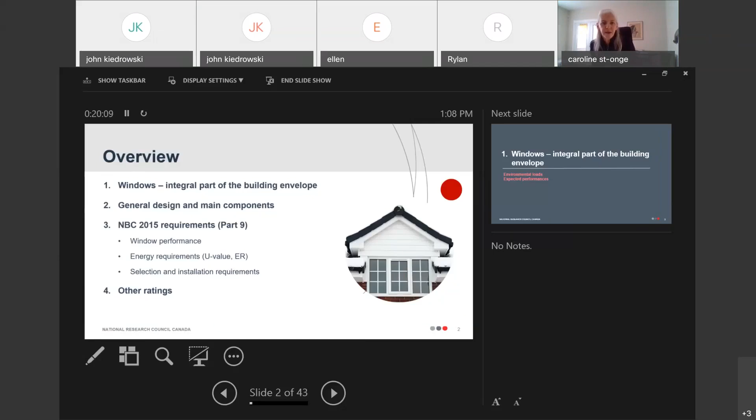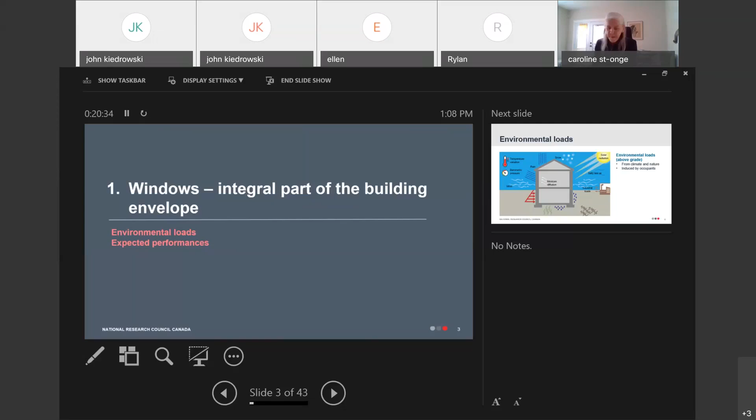For this first section, I would like to put into perspective the environmental loads that the building envelope is exposed to, because windows are part of the building envelope, so it's important to understand these loads. This figure shows the climate and nature loads over the building envelope, the roof and the wall, above grade. The building envelope is exposed to snow load, wind-driven rain, temperature variation, wind, solar radiation, salt sea air, and so on. It's also exposed to induced loads by occupants, such as moisture diffusion that goes through the envelope.

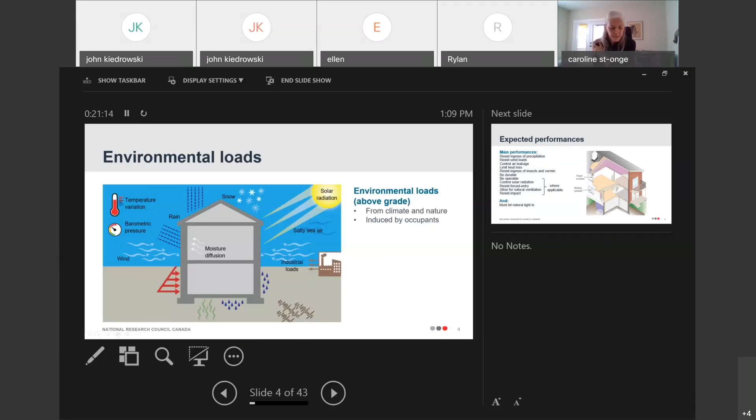It's the same with windows. Once installed within the building wall, windows are subjected to the same climate and nature loads. We expect the window to resist ingress of precipitation, resist wind loads, control air leakage, limit heat loss, control solar radiation, resist forced entry, etc. At the end, we also ask that we can see through windows, so they must let natural light in. So we are very demanding on window systems.

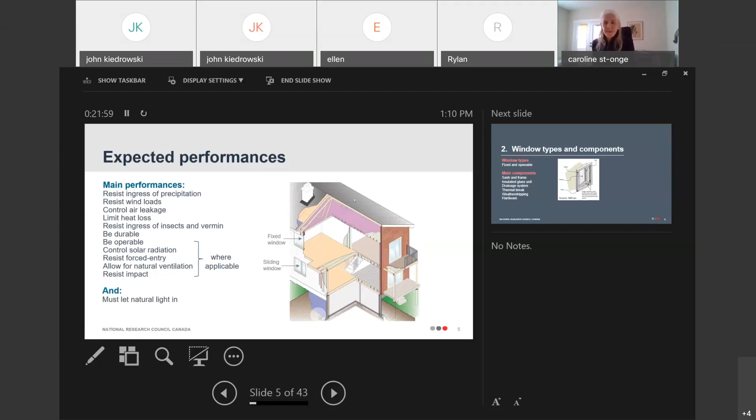Let's start section number 2, where I will go over window types and main components. I'm showing a simple configuration of a window, because I will use a lot of window terminology through my presentation: sash, frame, glazing, and so on. As an introduction, this would be a casement window with the frame. This is the sash that holds the glazing unit, and the frame is fixed to the rough opening of the wall.

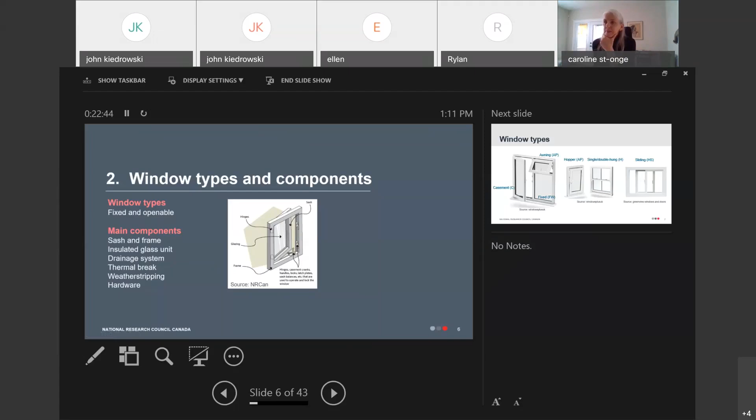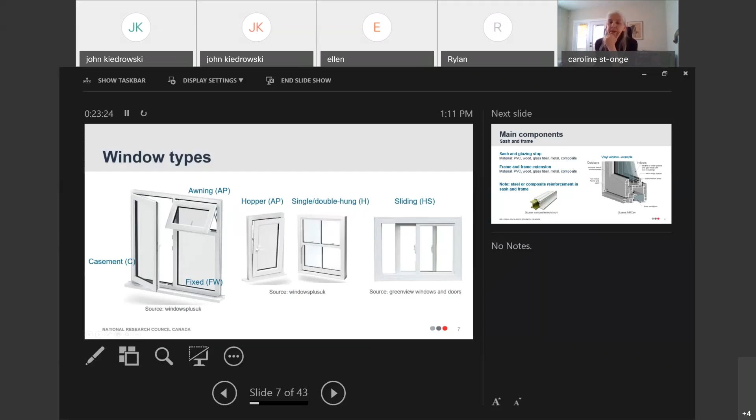The window types, besides fixed windows, include operable windows such as, from left to right: casement, awning, and hopper, with hinges. Awning and casement have hinges; single and double hung slide vertically; and there's the horizontal sliding window. I've added at the end of each type an acronym, which is important, because when you look at a window listing, you'll see mostly the acronym used at the end of a rating.

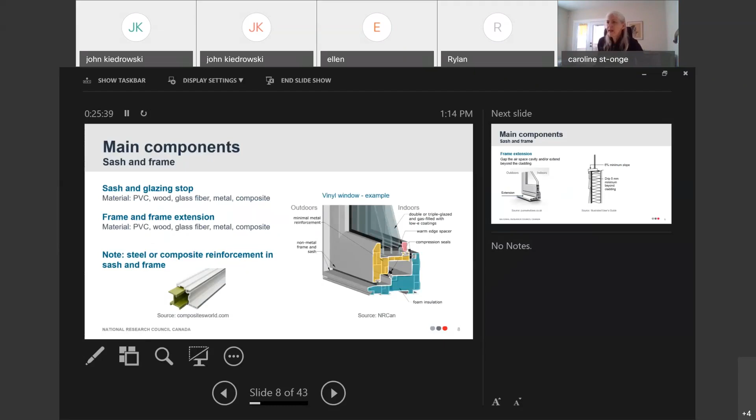A frame can come with an extension. On the left side, I'm showing a cross section of a PVC window. This is the frame, this whole part, and it would extend over the wall to cover the gap in the air cavity between the sheathing membrane and the cladding, helping to extend the frame beyond the cladding.

On the right side, I'm showing, from the National Building Code, the requirement for a self-flashing window: they should extend beyond the cladding.

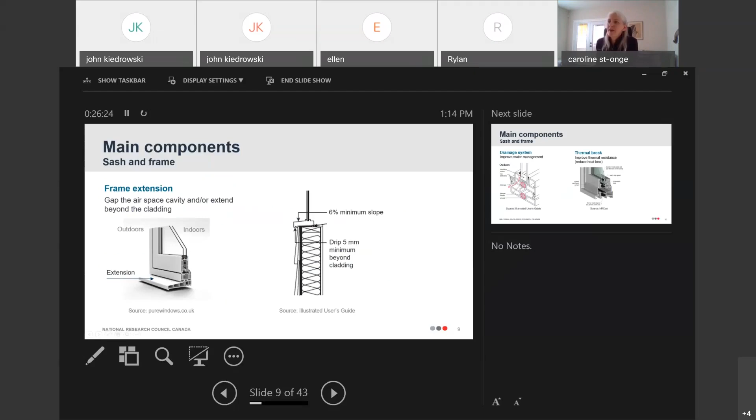Another important part of the design of the window is the drainage system. Not all windows have a drainage system, but some do. On the left side, I'm showing a cross-section of a window made of metal, a casement window. The pink arrow shows the possible path of water, because between the insulated glass unit and the sash there might be a problem with the sealant, and water can get in.

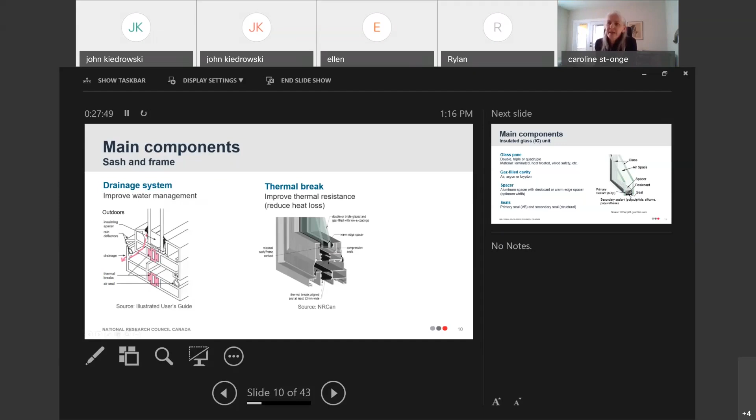The designer of the window created holes within the sash and frame so the water can be evacuated out. On the right side, I'm showing another important component, the thermal break, especially for metal sash and frame. Here, this is the sash, and below it the frame. The black section is showing the thermal break, which is usually almost halfway in the width of the sash or frame. On the left side, you have the thermal break as well, shown in pink, in the sash and in the frame of the window.

Another important component of the window is the insulated glass unit, also called an IG unit. I'm sure you've heard about IG units. An IG unit includes glass panes, and the glass is held in place with a spacer installed at the perimeter of the panes, which permits maintaining a specific width between the two panes.

The spacer shown in this figure is an aluminum spacer with a desiccant, a drying material to absorb moisture present between both panes. The IG unit includes a sealant, shown here below the spacer with the desiccant, and in black below it these are the seals. There is seal as well on the side, the primary seal and the secondary seal, which is structural to hold the panes in place.

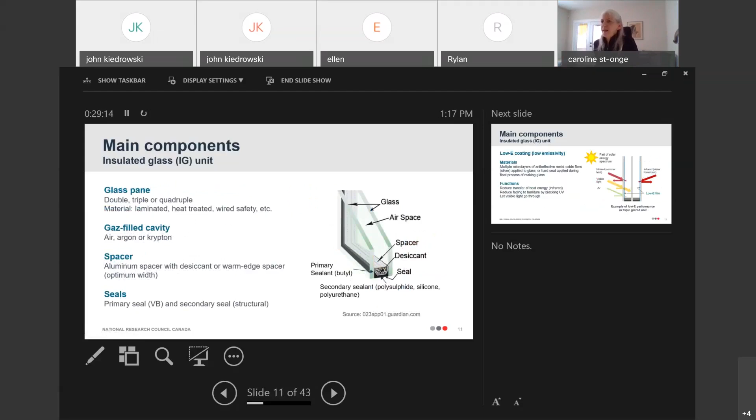Since most of the energy loss is through the IG unit, designs were created to lower the issue of heat transfer through the glazing by inventing low-E coating. Low-E means low emissivity. In this figure, you can see the low emissivity coating represented by the blue line.

In such a design, you would expect that the IG unit with the low-E coating would reduce the transfer of heat, infrared radiation, from exterior through to the interior, and would reduce UV through the IG unit. By reducing the heat, it controls the environment better, and by reducing UV, it reduces the fading of your furniture and decor.

But although the technology reduces those transfers of energy, it will let the visible light go through the IG unit. On the interior side, the low-E coating will help reduce the home heat from going through the IG unit, so it keeps the heat back inside.

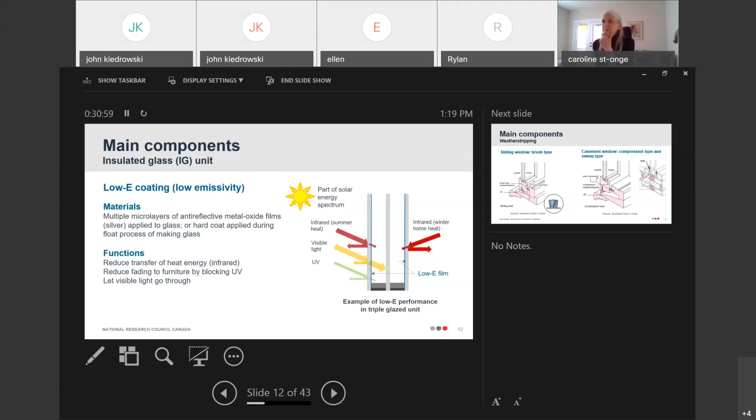Weather stripping, another part of the window which is extremely important for operable windows. On the left side, I'm showing a sliding window. Sliding window would have weather stripping in the type of brush, like a toothbrush. Since it is a sliding sash over a fixed frame, this is the type of weather stripping designed for that type of window. For casement window, since the sash swings over and compresses against the frame, you need a compression seal. There is also a seal between the glazing, the IG unit, and the sash, shown here on the right figure.

The red line is showing the path of air leakage between the sash and the frame. Although they are closed and locked, if the seals are not properly installed, or there is a defect in the seal, you would have air leakage.

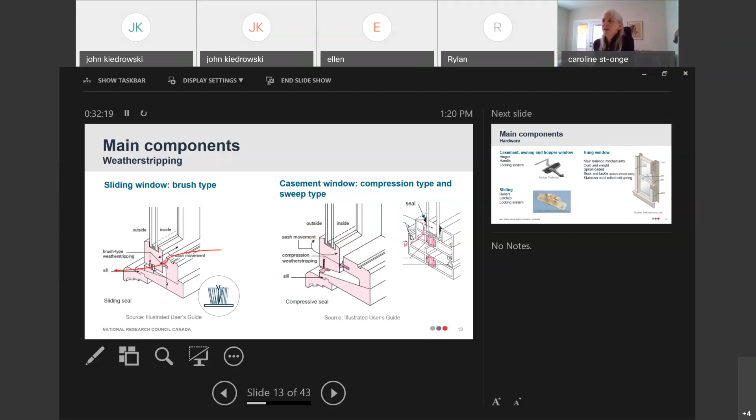And finally, the last main component of the window, hardware, of course. Hinges will vary depending on the type of window and how they operate. I'm showing a casement, awning, and hopper window, which use hinges, handles, and locking system. I would like to highlight here, this is what I was discussing with John and Claude prior to the beginning of this presentation.

Casement window has a handle with a housing fixed to the frame of the window, and the interior of that housing should have details to ensure airtightness. You can feel if it's not right, or there's a defect, you can feel a draft of air if you put your hand over that housing.

Sliding window would use rollers, latches, and locking system. And on the right side, I'm showing a hung window with a different balance mechanism.

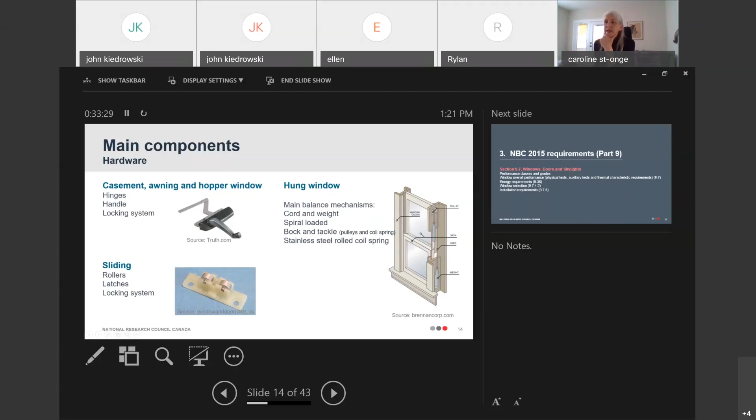So before we start section 3, which is the core of the presentation, I'd like to know if you have any questions.

Actually, I have a question. I noticed in some cases manufacturers are advertising these solar films you can put over for higher R value, and for sun beating in, so you can control your sun in the rooms. Does that have any really bigger R value on windows?

John, I'm not sure what type of system you are referring to. Is it something added on the exterior side of the window, or is it integrated within the window? I'm not sure if it's going to help, but when windows are tested, the window is tested with a frame, sash, and glazing. So in principle, the rating that you get from a window does not come with any added system.

So okay, yeah, what you are saying, unfortunately, you won't have any rating with that component added on the exterior side of that window. You will have only the rating for the window itself, frame, sash, and glazing.

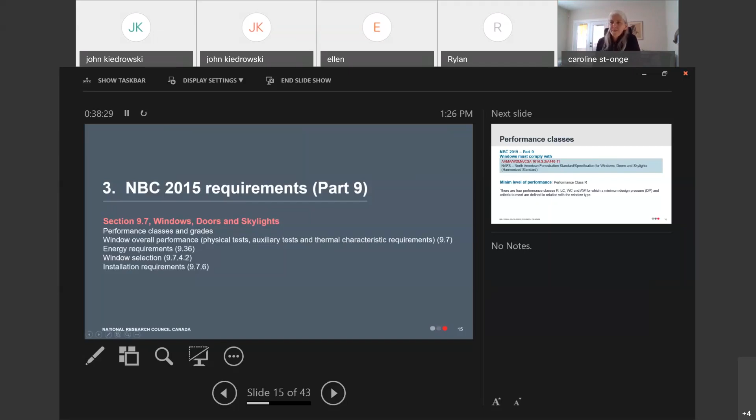In this section, I will go over the NBC requirement, specifically NBC 2015, part 9 only. We'll explain the performance classes and grades, the window overall performance, physical tests, auxiliary tests, and thermal characteristic requirements. The energy requirements will explain the window selection and quickly go over some installation requirements.

The National Building Code requires that a window be tested in compliance with this standard. It's a very long name, but in Canada we call it CSA A440-11. This is for the edition 2011, which is referenced within the National Building Code 2015. The title is North American Fenestration Standard Specification for Windows, Doors, and Skylights.

It has been harmonized early in the 2000s. In 2005, I believe, was the first edition of this harmonized standard with US and Canada. Although they say harmonized, when you read the standard, you will see some tables specific for USA and some tables specific for Canada. That's the way it is.

So the code requires that the windows be tested in compliance with that standard. And the code also says that the minimum level of performance must be class R. I will explain what this is all about. There are 4 performance classes called R, LC, WC, and AW, for which the minimum design pressure and criteria to meet are defined in relation with the window type. So let's have a look at what this is all about.

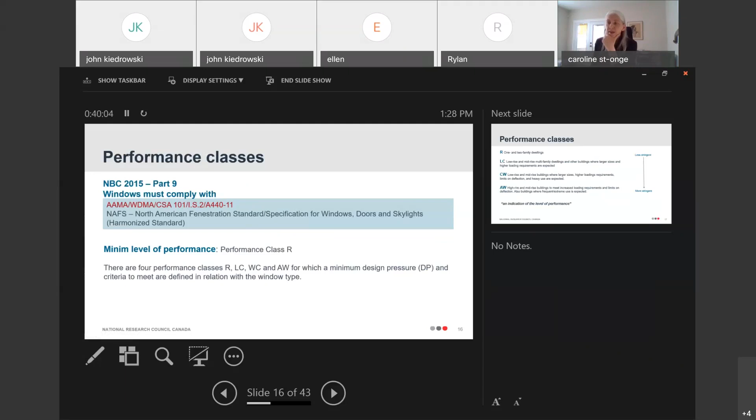Performance classes, there are 4 performance classes. And from R to AW, this would be for less stringent loads applied to buildings to more stringent loads applied. So R would be for 1 or 2-family dwellings. LC would be for low-rise, mid-rise dwellings. And CW for low-rise, mid-rise, but with higher loading requirements. AW would be for high-rise buildings to meet increased loading requirements.

But these are an indication of the level of performance. They must be seen as guidelines.

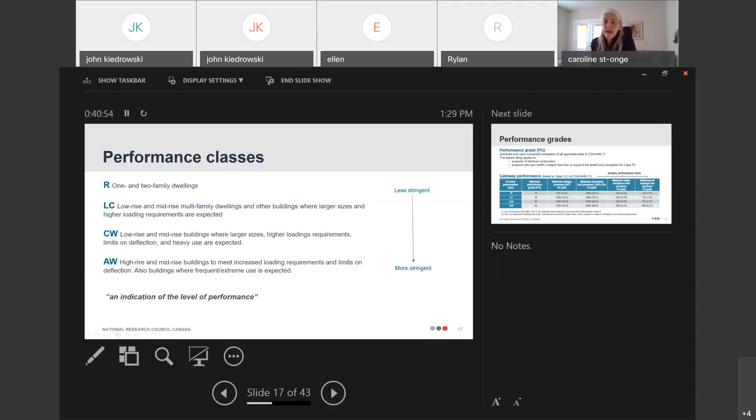So what does performance grades mean? The performance grade is the new classification system. In the past, I guess some of you may remember the classification A, B, C, A3, B3, C5 for air leakage, water penetration, and structural test. Now it's changed since 2005 for gateway performance.

It's called a performance class, which has a minimum performance grade. And in order to determine what that minimum performance grade is, you need to have the product tested in compliance with CSA A440 edition 2011. So the product tested has to meet all the requirements related to that performance class and minimum performance grade.

The window product that is tested in the lab to be assigned a performance grade and performance class will be tested with a specific size. Any other product of the same construction and with a size lower than the one tested will be assigned the same performance grade and performance class.

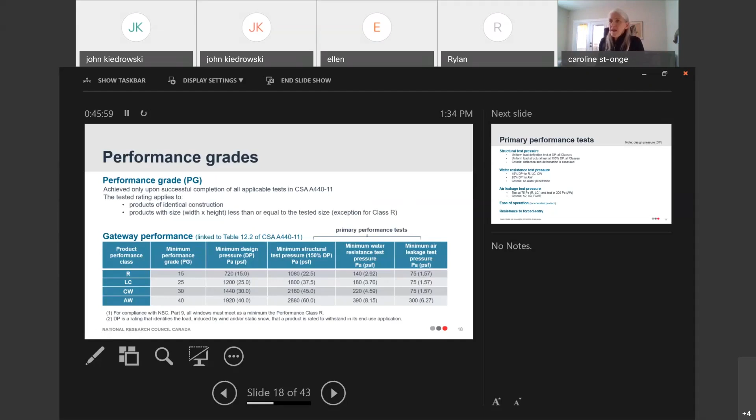So in order to meet CSA A440, again, everything is linked to the National Building Code. The code says windows must meet CSA A440, and CSA A440 includes multiple tests. The primary performance tests are the following: structural test. So you have uniform load deflection test, uniform load structural test at 150% of the design pressure. And the criteria they look for is the deflection and deformation of the sash and frame.

There is water resistance test, of course, with specific pressure applied. The criteria is no water penetration. There is air leakage test at very specific pressure, and the criteria here is A2, A3, or fixed. And actually, they kept only that from the past.

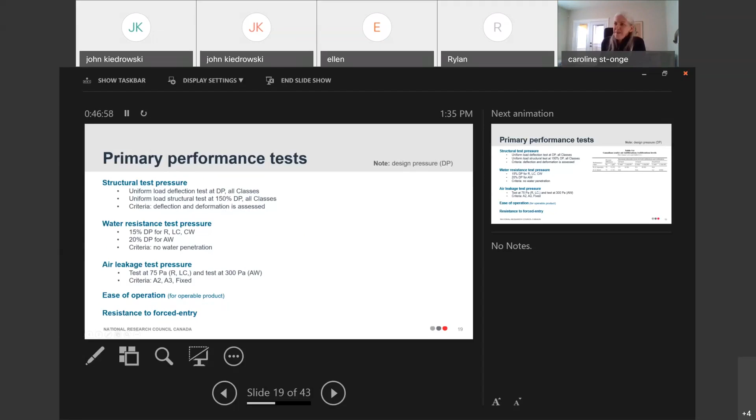I'm showing here in these tables excerpts from the CSA standard A440, and these are the air infiltration and exfiltration levels for windows in Canada. So depending on the performance class that we just discussed, if it's a performance class R or LC, and it's an operable window, then here are the minimum levels of performance that the window must meet: A2, but it can be A3. This shows how many liters per square meter of water, of air infiltration or exfiltration, is possible.

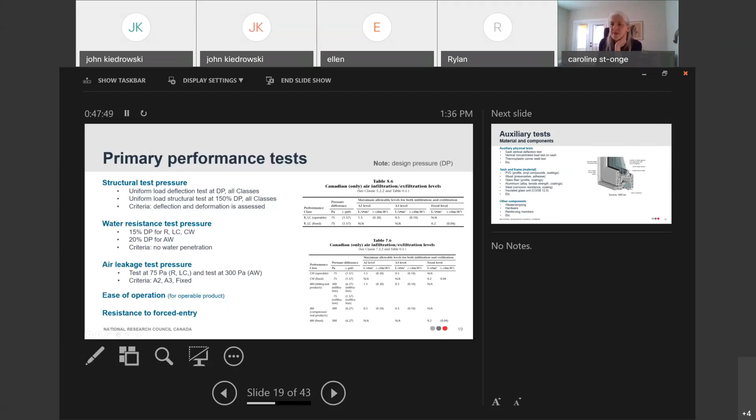Besides structural, water, and air leakage tests, there is ease of operation test, and there is resistance to forced entry tests that are done on the window as well. And multiple auxiliary tests are done too, such as the sash vertical deflection test, vertical concentrated load, thermoplastic corner weld test, and so on. There's a long list.

And in terms of durability, the material of the sash and frame must meet a few standards. For example, vinyl compounds for PVC windows must meet an ASTM standard. If there is a wood sash or frame, the wood treatment must meet some requirements. Glass fiber as well, the coating, of course, corrosion resistant requirement for steel. The insulated glass unit shown here must meet a CGSB standard, and so on. So the list is very long.

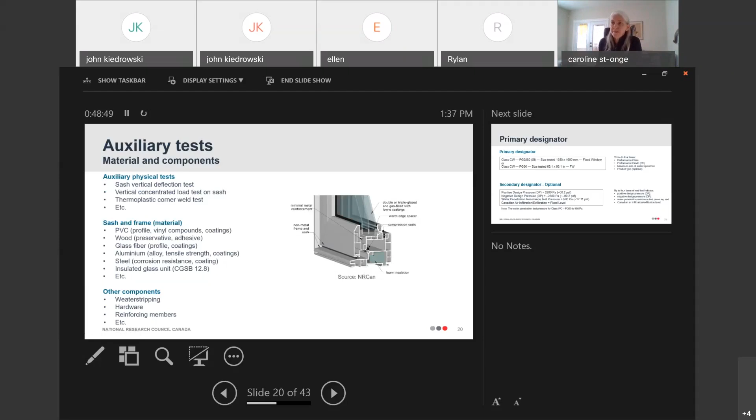And in addition, there is the weather stripping, hardware, reinforcing members that must meet the requirements of the standard. So at the end of the day, when the specimen tested in the lab has met all the applicable requirements, then a rating can be assigned to that tested window.

And this is, I will try to explain to you how the window must be classified now. They mention that the window, on the product literature, has to have the primary designator. What does it mean? It means that the manufacturer has to specify in its product literature the class, so CW, PG, performance grade, and the size of the window tested, and optionally the operation, the type of window.

This is an example of a fixed window. So this means when you see this on a product or on a window listing on CSA Group, for example, you will see the class, performance grade, and size tested. Again, I mentioned that earlier: if you see on-site a window that comes with that product literature, but the window size is bigger than the size shown here, then there is a problem. You should refuse that window because you will not be sure that it will meet the requirement of the standard.

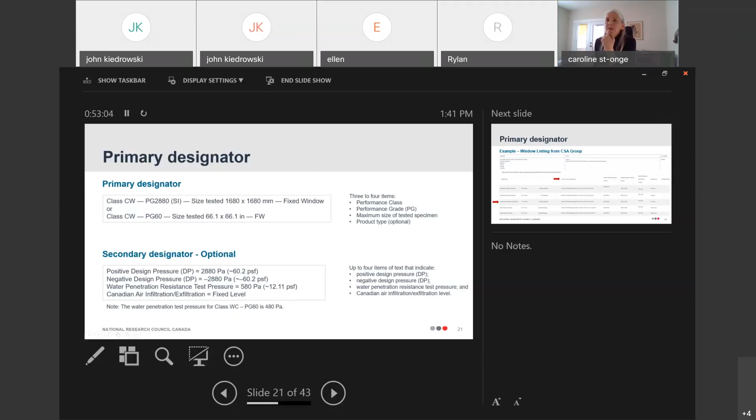I don't think I've mentioned, but you can see the designator in metric units or in imperial units. On the first line I'll show the metric units, and the second line is the imperial unit. So PG60 is in pound per square foot, and 2,880 is in Pascal.

This is an excerpt from the CSA Group website, a window listing. I know it's very small, but it's just to show you how it looks. I've highlighted in red the primary product designator, and pointed out an example: this is a casement multi-point lock series, double glazing. You see here how they spell out the primary product designator, in compliance with the requirements of the standard. So they start with the class CW, followed by the performance grade 60.

This is in imperial units. The size test in metric and in imperial, followed by the type C, meaning casement. On the right side, this corresponds to the secondary designator, which outlines the positive and negative pressure, the water resistance, and the level of air leakage that the window has reached.

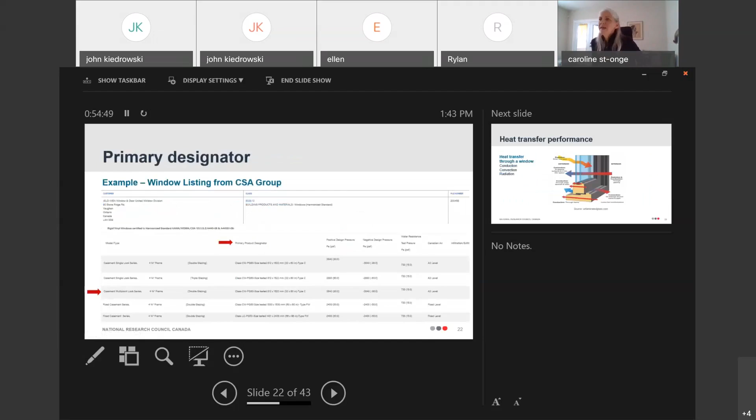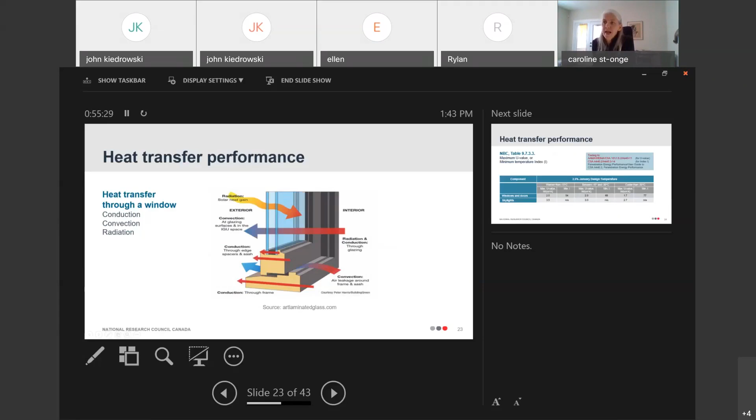So the National Building Code also includes requirements regarding heat transfer performance of windows. As mentioned earlier, a large percentage of energy is lost through windows. Heat loss occurs due to different modes of heat transfer: by conduction through the frame and sash, by convection through the gap between the sash and frame, or by radiation and conduction through the insulated glass unit.

The code requires, under Table 9.7.3.3, that the window meet the maximum U value or meet the minimum temperature index. This table summarizes the requirements within the National Building Code. It shows that for windows, depending on whether the window is exposed to temperatures cooler than -30 under the 2.5% January design temperature, then for this outdoor condition, the maximum U value must be 1.7. What does it mean, maximum U value?

U value is the reciprocal of thermal resistance. So if you speak about U value, it means the transmittance, not the resistance — it's the opposite. If you want an idea of what the corresponding R value would be for a U value of 1.7, you just calculate 1 divided by 1.7, and this gives you 0.58, or R 3.3.

So the lower the U value, the better the performance of the window. The code requires either a maximum U value or a minimum temperature index. In that same area, the minimum index temperature would be 77. This is a calculation of the temperature of the frame minus the outdoor temperature — a temperature difference between the interior temperature of the frame versus the outdoor temperature, over the delta T, the temperature difference between the interior air and the exterior air. So it's just a ratio.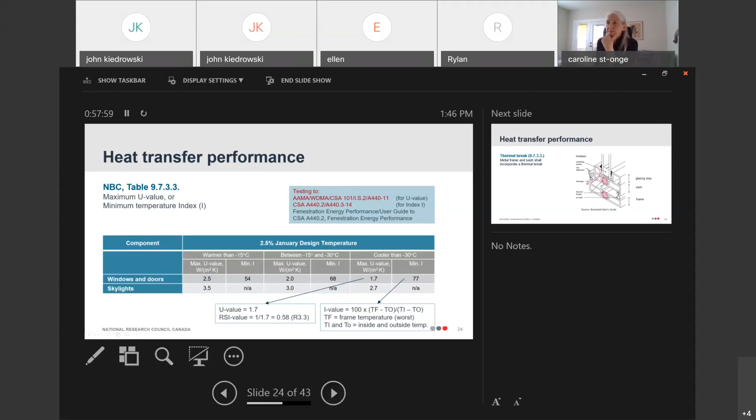The code also requires that a thermal break be installed within the sash and frame of metal frame windows. I've discussed that earlier, so it's just to mention that this is part of Article 9.7.3.3 from the code.

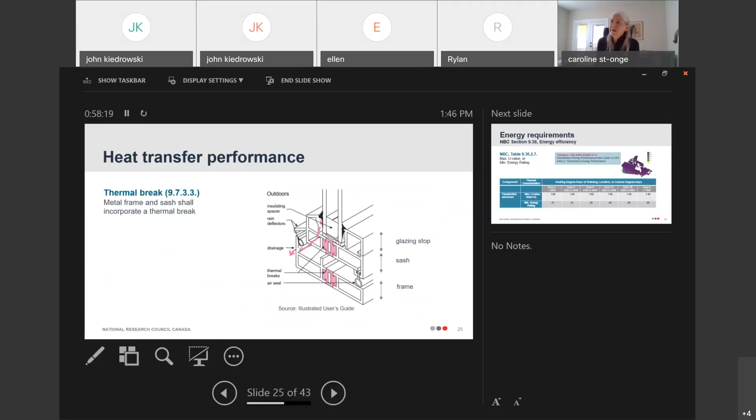Section 9.36, as you know, relates to energy efficiency, and the code requires under Table 9.36.2.7 that windows meet the maximum U value shown in that table, or meet the minimum energy rating. Windows must be tested in compliance with CSA A440.2, which includes A440.3. Once tested, you compare the results to the criteria shown in this table. For example, if the project is located in zone 7B, the maximum U value must be 1.4, and the energy rating would be 29 for zone 7B. Any questions on these ratings?

So if I was a community in the Northwest Territories, I would go for Zone 8 as part of my technical specifications for windows. Is that correct? Yes. So if somebody's going to tender a contract, they should have this in their technical specs, because you don't want a contractor sliding zone 4 windows into a zone 8 project. If you don't specify, you'll get zone 4 windows in zone 8.

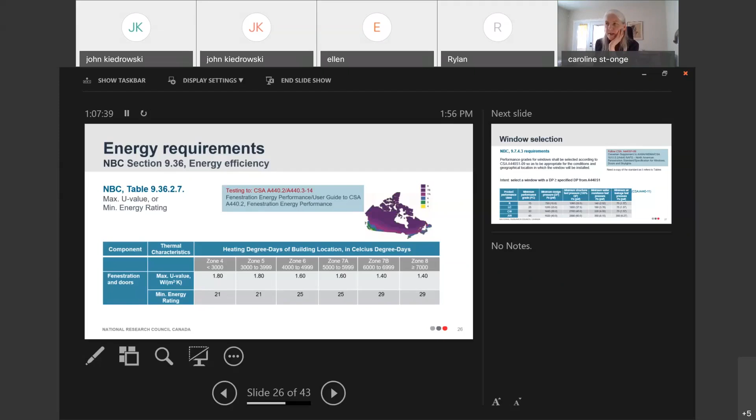Now, with respect to window selection, the National Building Code requires that windows are selected following the CSA standard A440S1-09. This is stated in NBC 2015 under Article 9.7.4.3. So the code says windows have to be selected in compliance with that standard, and the performance grades for windows shall be selected according to that standard so as to be appropriate for the conditions and geographical location in which the window will be installed.

At the end of the day, you want to ensure that you select a window with a design pressure equal to or higher than the specified design pressure from A440S1. What does that mean? Let's go over an example.

As a reminder, I've copied that table I was talking about earlier. This is from the CSA A440 standard, which shows the minimum performance class, minimum performance grade, and minimum design pressure—these pressures are used for the primary tests such as structural, water, and air leakage. CSA A440 says these are the minimum, but a manufacturer can decide to have his product tested to a higher performance grade. Performance grade can go from 15 to 100, so pressure can be much more than what's shown here. This is just a gateway performance.

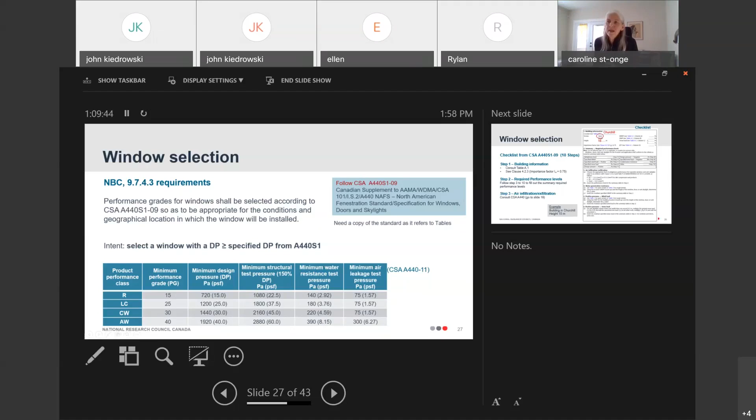So again, this is the window selection requirement under CSA A440, shown in CSA A440S1. I will quickly go over the different steps—there are 10 steps to follow. It starts at the top here with building information.

So what do they mean here? They say you have to specify the location. Let's take an example: the building is in Churchill, and the height of the building is 15 meters. So you will write Churchill, the terrain is open, the height is 15 meters. Get those values here, which relate to wind pressure, driven rain, hourly wind pressure, and so on. They say go to table A1 to get that data. You need to have a copy of CSA A440 and CSA A440S1 to understand all this, because you need to flip from one standard to another and look at those tables.

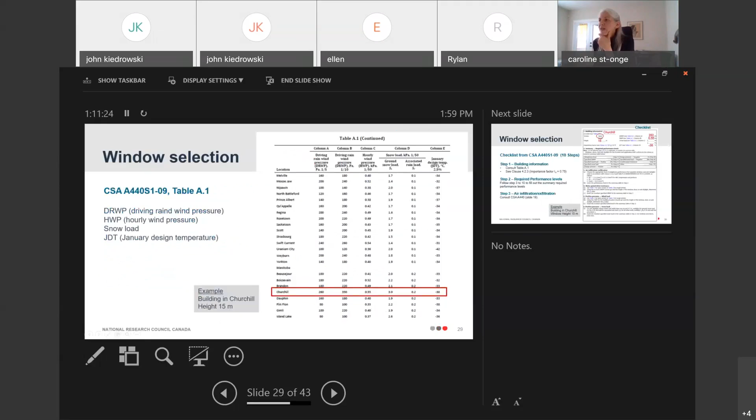So let's go to table A1 here to get that data. This is a copy of table A1, and our case is a building in Churchill. So I'm looking at the location Churchill, and I will take those parameters here in relation to Churchill. I would go back to that checklist and fill in the blanks. I won't go through all of it, but this is just to show the idea of how it's supposed to work.

So once step 1 is done, you go to step 2. They require performance levels—step 2 says you have to fill out this summary table. There are steps 3 to 10 to follow, and it's all explained here.

So in order to fill out that line in the table, you have to follow step 3. If I go to step 3, it says consult CSA A440. So you consult CSA A440 and get the minimum rating, then write it down here.

Then you go to step 4, water penetration resistance. How does it work? You determine the specified driven rain pressure by going into tables 1 and 2. We said in our example it was an open terrain, so we go to table 1. Table 1 gives the specified driven rain wind pressure, and you need to know the 1/10 pressure and the height of the building to get that value, 463. So you fill in the blank and continue with the table.

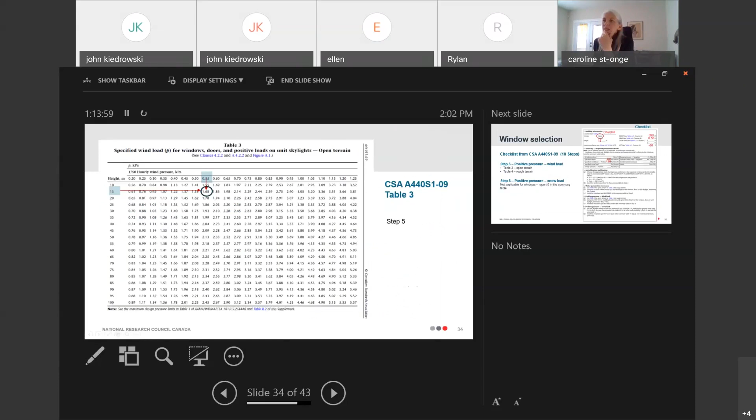This is table 3. I have to know the 1/50 hourly wind pressure from the earlier table, A.1. The height is 15, so I get that value, and I go back to my checklist and include it there.

Then they say how to calculate the specified wind load. You just have to multiply the value you got under step 5 by 1,000, so you will get 1,680 Pascal. What this means is that your design pressure must be equal to or superior to 1,680 Pascal.

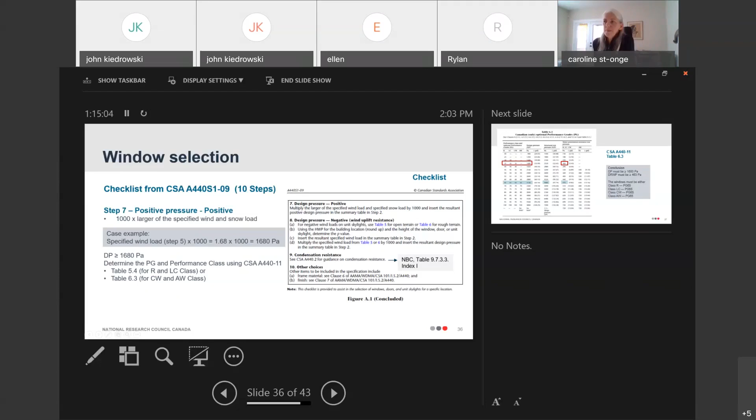So at the end, you go to the table in CSA A440-11 to determine what will be the performance class for a case of that pressure of 1,680. This is a copy of the table in CSA A440. What we are trying to figure out here is, if I have a window tested by CSA A440, what performance class and design pressure will be required in order to comply with that example project, where the specified design pressure is 1,680.

I look under here and I found that for this performance class, there is a design pressure of 1,680, and the water pressure resistance test minimum pressure is 260. But in our example, when we looked at the different tables and found the parameters, we found that the driven rain water pressure must be equal or superior to 463. So we cannot take this performance class.

We have to select a higher type of window, a higher performing window. So we have to go down to the one that has a water penetration resistance test done at 470 in order to meet that minimum specified pressure. With respect to the design pressure, it will definitely meet the design pressure of 1,680 Pascal.

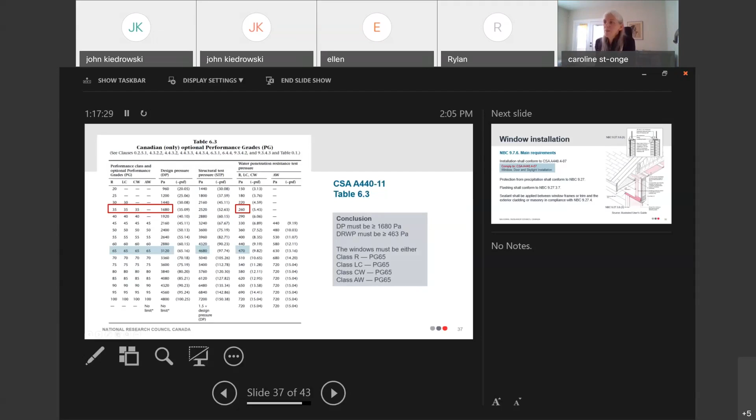So the standard for window selection is telling you how to determine the specified design pressure, considering the location of the building, the height of the building, and all the different parameters in terms of load associated to that project. Then you have to select a window which will have a performance that will meet those specifications. This is what I'm trying to show here: once you know the specification, you pick a window that will have the proper ratings in order to meet those wind loads and pressure.

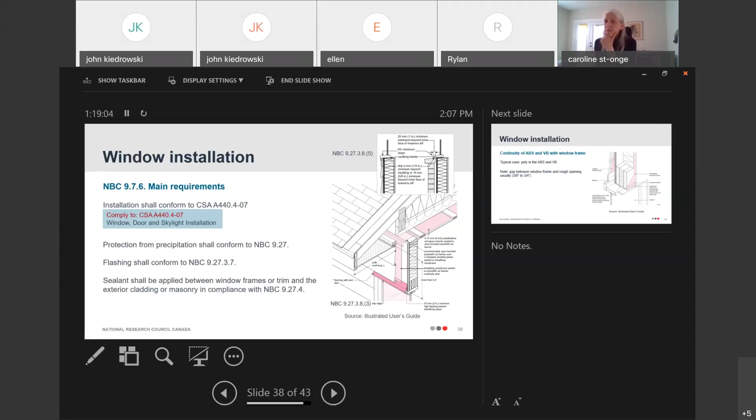There's also a requirement for continuity of the air barrier system and vapor barrier with the window frame. I've pulled out a figure showing a typical case where the poly is the air barrier and vapor barrier, and this shows that the top of the window, the frame, shall be connected to the poly, which is acting as the air barrier and vapor barrier.

Any means can be used: polyurethane foam, a system of caulking with backer rod, and so on.

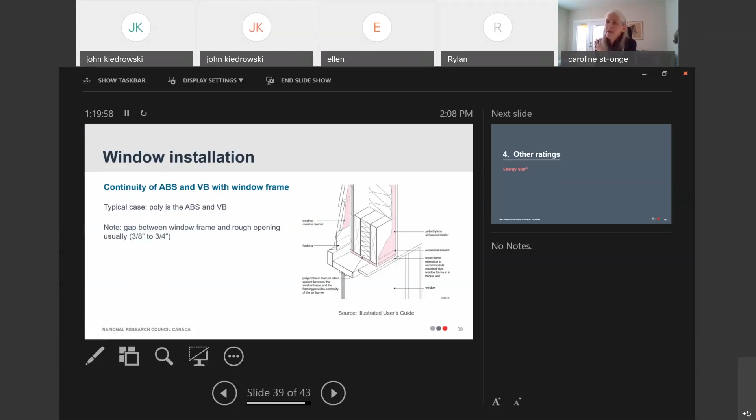And finally, other ratings: Energy Star. I'm sure you've seen the Energy Star label on different products, and they refer to different ratings. U value is the same thing as U factor; this is the rating given to a window based on how much heat loss it allows. Solar heat gain coefficient is the fraction of solar radiation admitted through the window. Energy rating we discussed earlier, and visual transmittance is the measure of how much visible light passes through the glass.

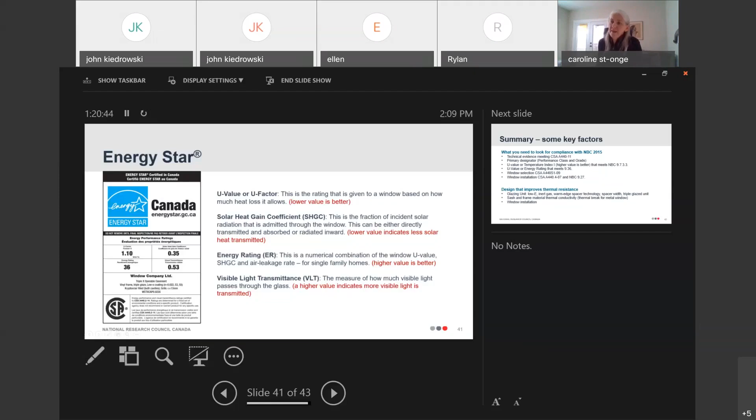As a summary, some factors to look for: compliance with NBC 2015, technical evidence that the window meets CSA A440, the primary designator which includes performance class and performance grade, U value or temperature index that meets NBC 9.7.3.3, U value or energy rating that meets 9.36, and the window should be selected per A440S1 and installed per A440.4 and NBC 9.27.

I want to end by saying that the design improvement in thermal resistance is mostly in the glazing unit. There should be a low-E type of technology, inert gas, warm edge spacer technology. The spacer width is important as well, and a better glass unit would improve the thermal resistance of the window. If it's a metal window, the sash and frame should include a thermal break. And at the end, window installation is a very important factor as well.